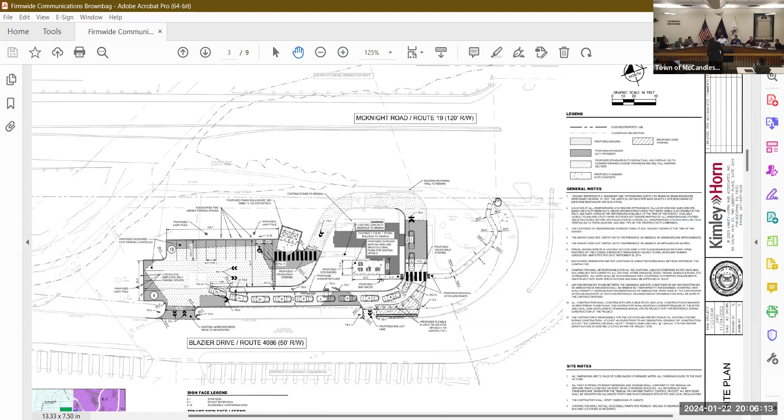So the first iteration of design, you can see that we have a sidewalk connection from our development, the crosswalk that goes through the drive-through lane and extends eastward towards the intersection of Blazier Drive and McKnight Road.

The next slide has an aerial image on it to give you a little bit better context, but it also has a red line that describes or delineates that lease line.

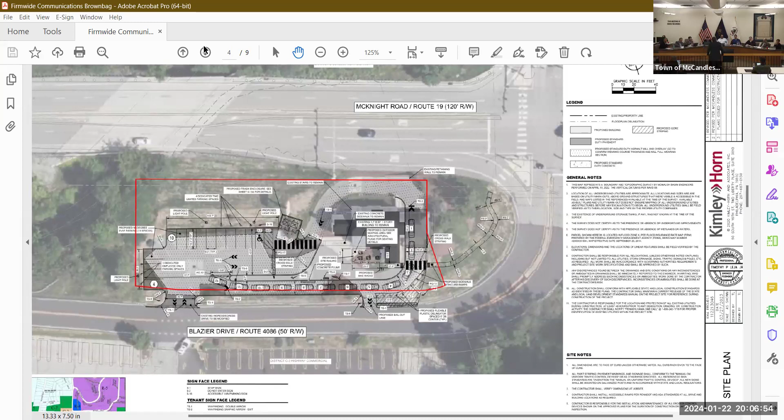The lease line encumbers essentially the building, drive aisles, parking lot, and this lease area is approximately 0.64 acres of a larger 3.3 acre parcel that extends east and west for a good distance, and has a lot of the stream, Pine Creek, in that property boundary.

We did present an option to remove the sidewalk in its entirety. So that is this particular plan. We've removed the sidewalk extension. We've removed the crosswalk going through the drive-through lane. We've removed any type of connection to the outdoor seating area.

And I will mention that our initial approved plan, because there's no receiving curb ramp at the corner of Blazier Drive and McKnight Road, we requested that we stop that sidewalk short of the state road right of way. And that was approved by council in 2022.

So part of the reason for that was because we felt like it wasn't necessary, or it wasn't appropriate to take that sidewalk into a road right of way without the receiving pedestrian infrastructure. And that premise is essentially why we're here tonight.

There is a section of the ordinance that says that the town council may waive the installation of sections of sidewalk when adjoining sections of the road do not have sidewalks, and if the town council and the town feels that it would be better to install that sidewalk infrastructure when the adjacent lands are developed.

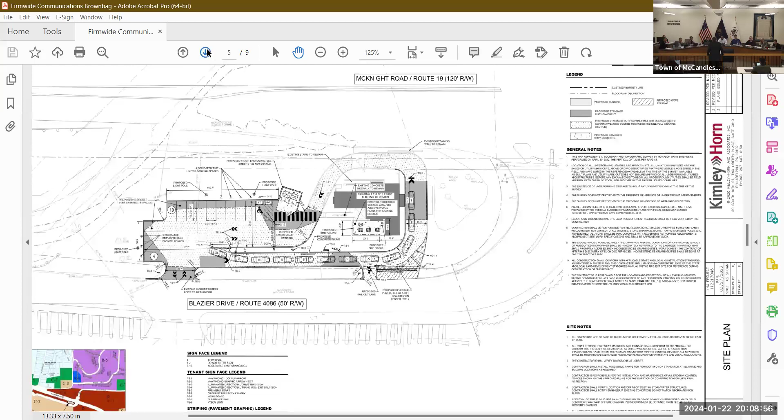I also have some images and locations of the nearest sidewalks. RJ, if you could just go past to the right here.

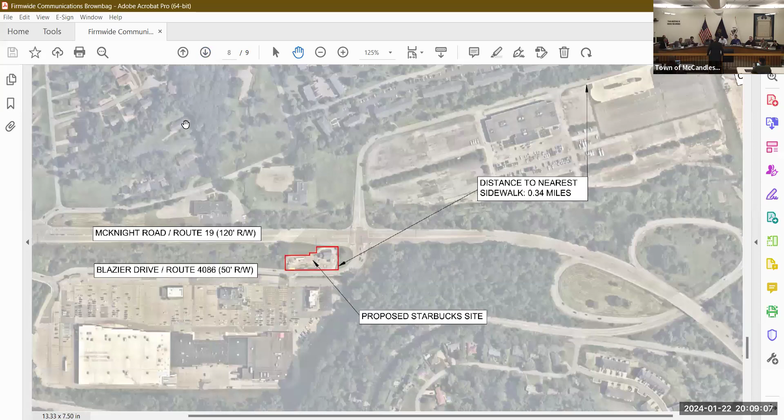So this is the site in red, and you can see across the McKnight Road from Blazier Drive, there is sidewalk infrastructure in a new Park and Ride that was constructed. There is new sidewalk there. It's approximately 0.34 miles away.

And that same ordinance says that an explanation would have to be given to the town council if the nearest sidewalk infrastructure is more than a third of a mile away. So I'm not making the argument that we are more than a third. We're essentially a third of a mile away from the nearest sidewalk infrastructure.

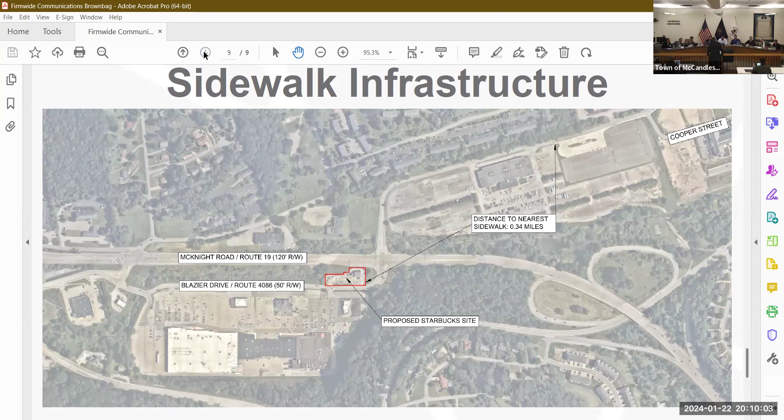So, and then the next slide has a few images that show the top left is looking from the Starbucks side of Blazier Drive across McKnight Road to the infrastructure that exists on the opposite side of the road.

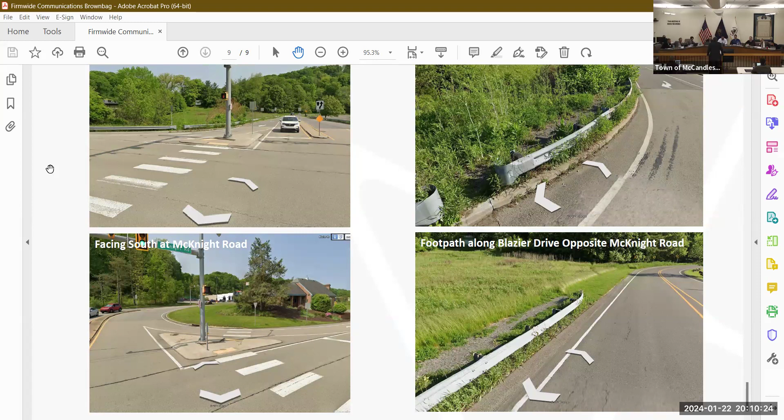The top right shows what that infrastructure looks like. It's a footpath. There's no curb ramp, there's no sidewalk. It's a gravel strip that is being used.

We're not making the argument that it's not being used. I think part of the discussion back in 2022 was that it would be nice to have this sidewalk connection, because it was communicated to us that there are pedestrians traveling this pathway. But per the ordinance, we believe it would be better suited to construct the sidewalk on the property that we lease and the adjacent parcel.

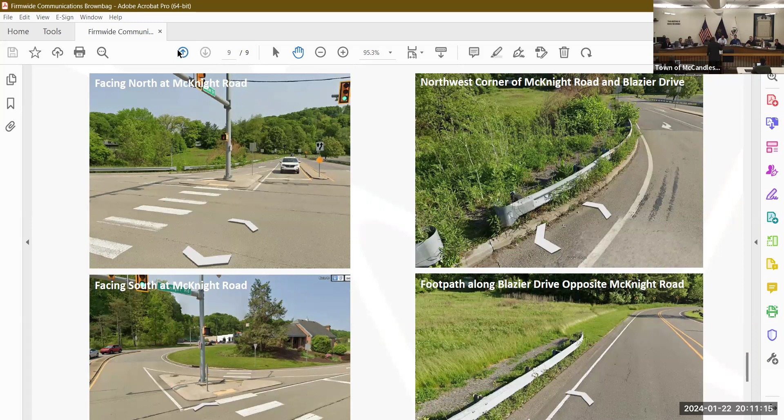I'm going to go to the actual proposed sidewalk connection that actually works. If we go back to this particular slide, it does show a sidewalk from the intersection of Blazier and McKnight traveling. It's a 5-foot sidewalk. We'd have a curb ramp, and it would follow the back of curb across the first entrance drive, if you will, to the old bank.

Right now it's a bailout lane for the drive-through, as well as delineators that keep traffic from entering in that particular location. We'd have a sidewalk across to another curb ramp, and we have a sidewalk proposed in the grass strip to the westerly entrance into the site. So we're looking at about 300 linear feet of sidewalk, 3 curb ramps, pavement markings.

We've done a preliminary opinion of probable cost, submitted that to the town and the town engineer. It's approximately $45,000 to install that sidewalk.

We're here tonight to essentially discuss that with you, to see if you'd be favorable to accept the fee in lieu of $45,000, or if it's something else that allows the town of McCandless to reallocate those funds elsewhere in the community, and say build a sidewalk, a missing piece elsewhere, and wait for the development across the street to have receiving infrastructure for the sidewalk at this location.

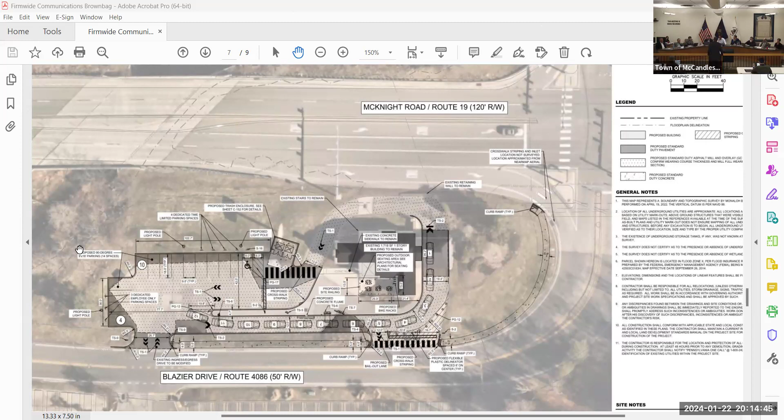Mr. Arler, do you have any questions for the gentleman this evening? I don't have any questions. I'm kind of in favor of making something work because of what's transpired down there recently. We'd like to have it mitigated, and a sidewalk put in, and I'm not really in favor of taking a fee in lieu of that.

Mr. Moldovan? Yes, sir. What's changed since we had a discussion back on December 22nd of 23? Just the identification of a lease line. I think we stated it in our application for this waiver request. It was a mistake that we made in terms of not understanding what that lease line looked like.

Who's the leaseholder? Pine Creek Development LLC, subsidiary of First City Company. Has anybody approached them and had any conversation about the sidewalk? Absolutely. What was their response? That there was no easement able to be granted for the sidewalk in its current location, that it would have to be off property and within the road right of way. So they're aware of our concern, Starbucks' concern.

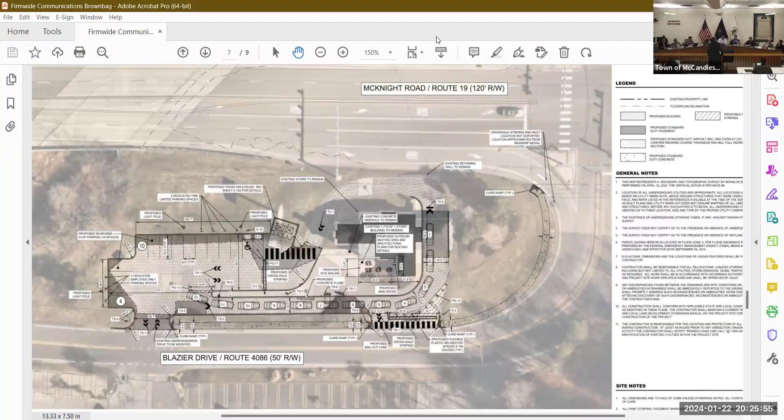Thank you, that's why we're here tonight, to have this conversation. We all want Starbucks here, but we all want to be able to get there, whatever mode it takes to get there. I've already used it as well, so thank you for your time.

You're welcome, thank you. I think at this time it sounds like we're looking for a motion to deny. So if somebody can make that motion and read that off here just for the correctness.

I'd like to make a motion to deny the modification request submitted by Starbucks at 95 Blazier Drive, to waive the construction of a sidewalk along Blazier Drive as required by the land development application previously approved on December 19th, 2022, and to allow a fee in lieu payment as calculated by the town engineer. Second. All those in favor, please indicate by saying aye. Motion is denied.